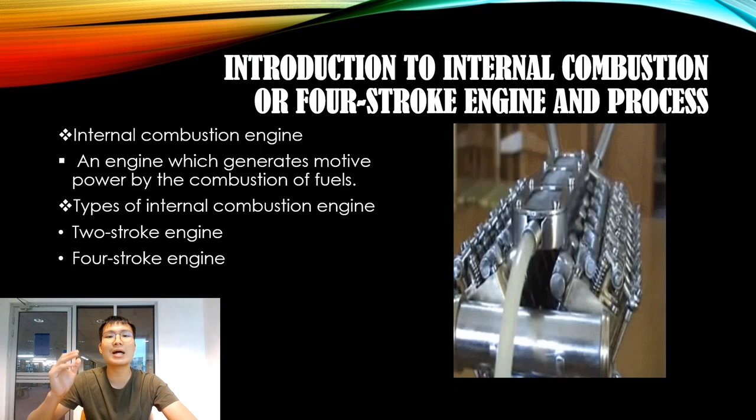An internal combustion engine is defined as a heat engine which produces work done by the combustion of fuels. Internal combustion engines can be either two-stroke or four-stroke. Instead of two-stroke, the most common internal combustion engine is the four-stroke or four-cycle engine, due to its reliability and performance. With the four-stroke internal combustion engine, automobile technology keeps evolving and is gradually accepted by the public, allowing people to shuttle from city to city freely nowadays.

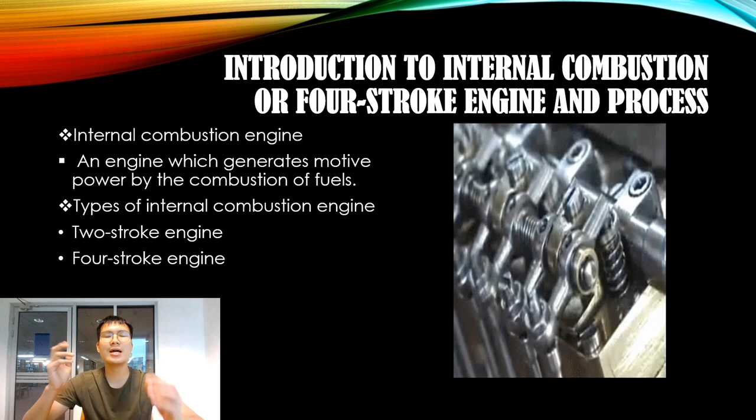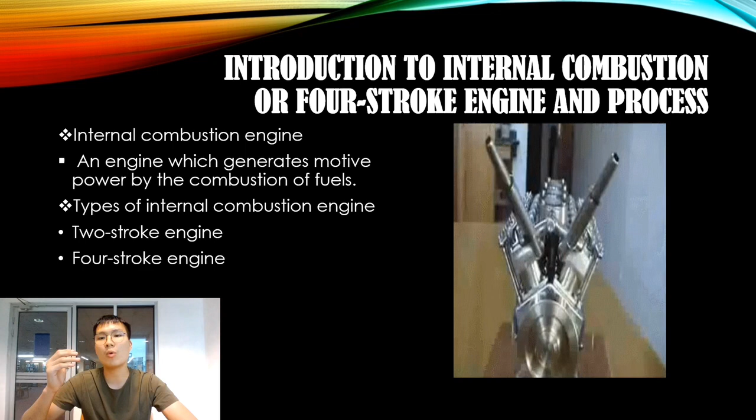SEC reported that on May 9, 1876, German inventor Nikolaus Otto, working with Gottlieb Daimler and Wilhelm Maybach, started the world's first internal combustion engine that efficiently burned fuel directly in a combustion chamber. Combustion in a car engine includes four important phases, which are intake stroke, compression stroke, power stroke, and exhaust stroke.

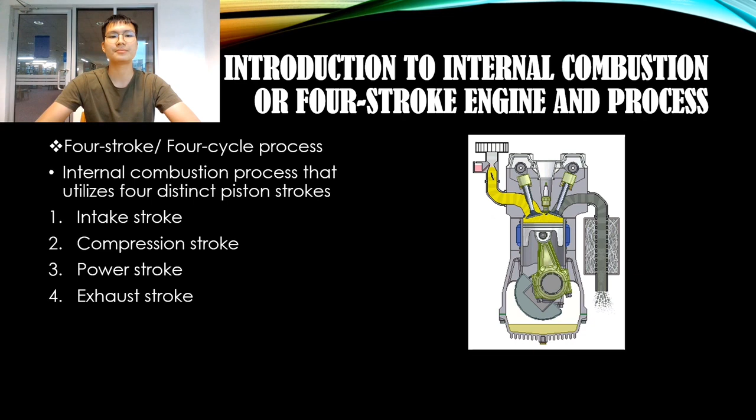I will talk about the first phase of internal combustion. The first phase is the intake stroke, which is the initial process of internal combustion in a car engine. During the intake stroke, the combustion chamber is filled with fuel and air, and the piston starts at top dead center, called TDC, to empty the combustion chamber. The piston then depresses inside the cylinder bore.

Next, whirling flows are induced by the inlet flows through the intake port and valve. This creates large-scale rotating patterns such as swirl motion and tumble motion, which rotate cylindrically and diametrically about the axis respectively. The induction process is extremely crucial because it is part of the intake process used to obtain high turbulence intensity in order to achieve a rapid burning rate.

Meanwhile, the exhaust valve is closed to allow the formation of a vacuum by the piston moving downward, which transfers the air and fuel mixture into the engine through the intake valve. According to Yamakata, the air-fuel charge is forced into the evacuated chamber when the inlet valve opens, due to atmospheric pressure. Consequently, the chamber is filled with the combustible mixture of fuel and air. The piston arrives at bottom dead center, called BDC, then the inlet valve closes, and inside the chamber the mixture of fuel and air is sealed.

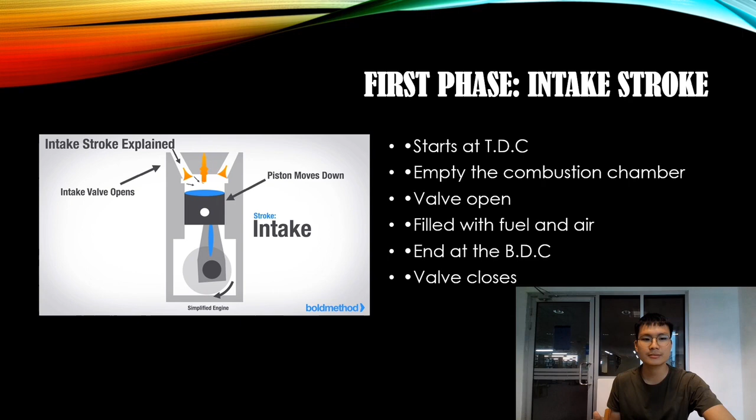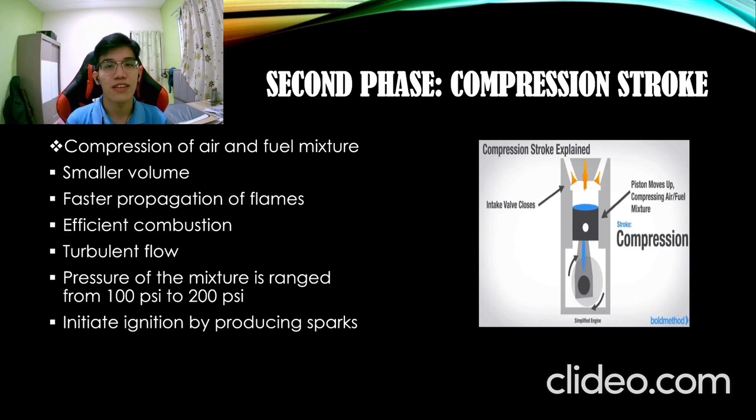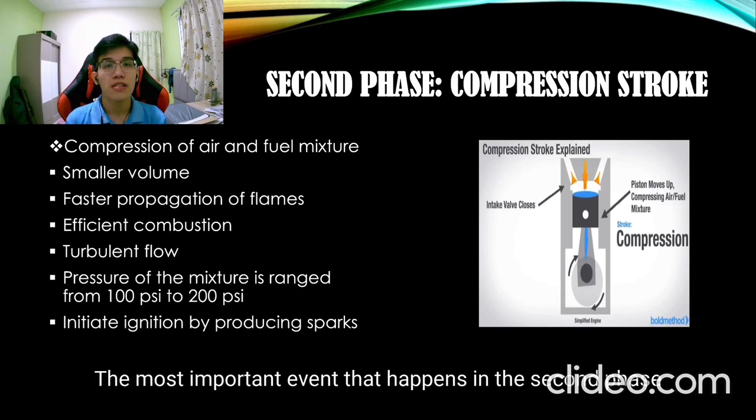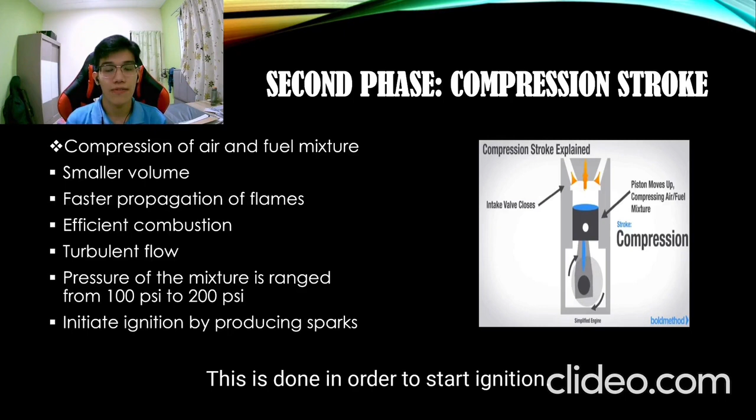Today I'm going to talk about the second phase of the internal combustion process in a car engine, which is the compression stroke. The most important event in this phase is the compression of the air and fuel mixture. During the compression stroke, the mixture of air and fuel is compressed to a smaller volume by pushing the piston and closing the intake valve. This is done in order to start ignition.

The propagation of flames is also done more quickly under high pressure, which allows the mixture to be burned more efficiently. Not only that, a turbulent flow is also formed under high pressure. Consequently, the mixture of air and fuel, which is in the form of fluid, also undergoes uneven fluctuation.

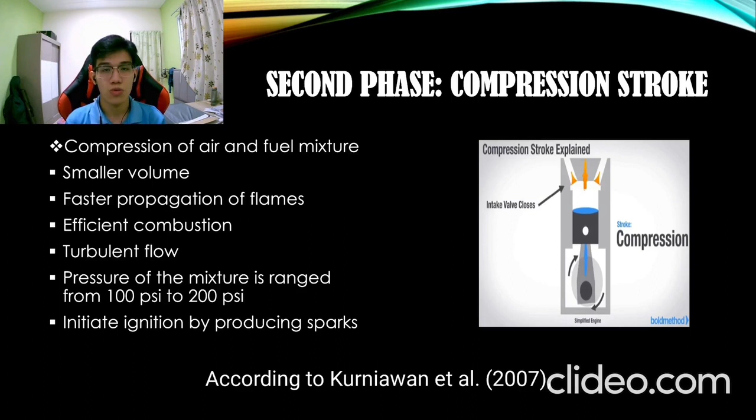According to Kurniawan et al. 2007, maximum turbulence is required to produce a uniform and even mixture of air and fuel, as well as a higher compression ratio. Normally, the pressure of the mixture ranges from 100 to 200 pounds per square inch. At the same time, electrical contact is kept open in order to produce sparks, which allows ignition.

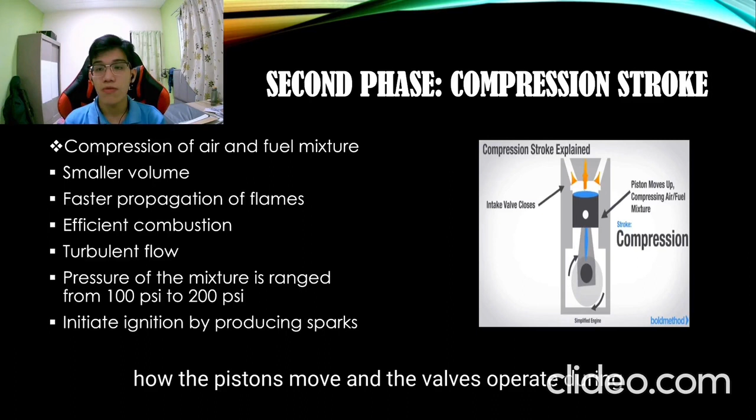Here is a simple diagram that shows how the piston moves and the valve operates during the compression stroke. During the compression stroke, the mixture of air and fuel is compressed to a smaller volume by pushing the piston and closing the intake valve.

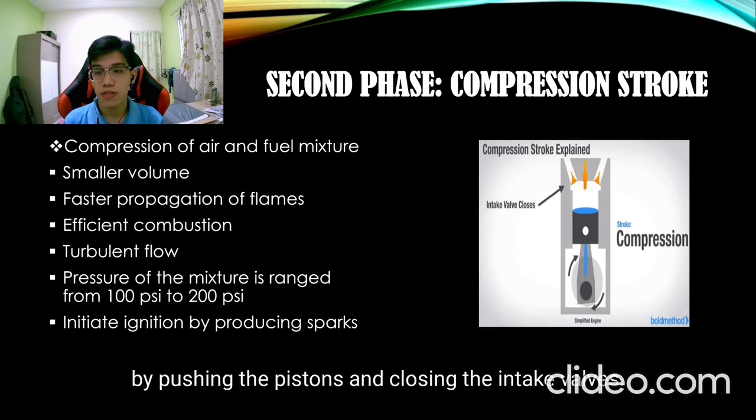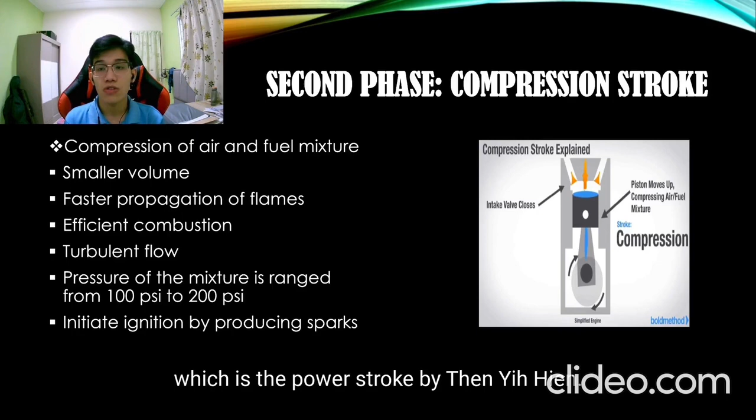Good morning. I will present the third phase of the internal combustion process, which is represented as the power stroke. During the power stroke process, before the piston reaches its highest point, named top dead center, the spark will send a current and ignite the fuel-air mixture. As the fuel and air combust, they expand and push down the piston. The directional motion of the piston moving down is converted to rotational motion as the piston turns the crankshaft, which provides power to the whole engine.

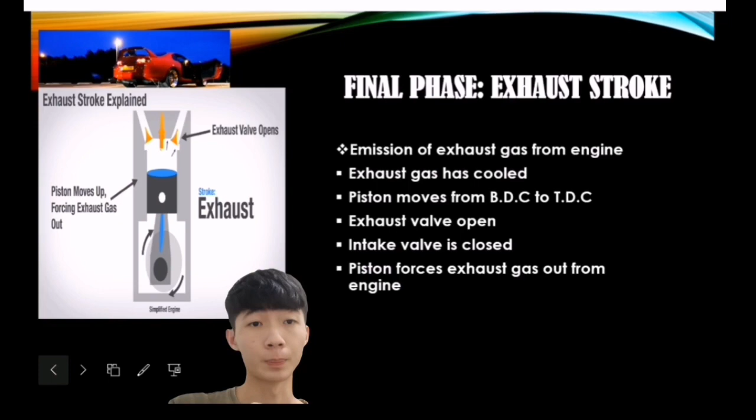Then the piston moves from bottom dead center to top dead center. After this, the exhaust valve opens and the intake valve is closed, pulled by the rocker arm, as shown in this picture. Then the piston forces the exhaust gas out from the engine through the exhaust valve.

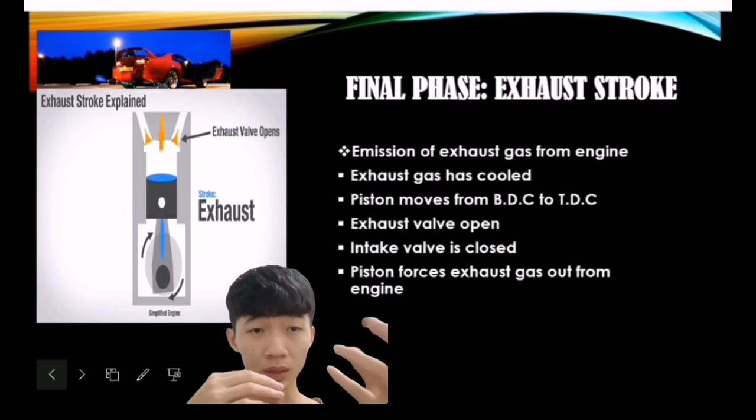This process continues when the piston stays at top dead center and is ready to start the first step of internal combustion of the engine, which is the intake stroke. So the intake valve now opens, and the exhaust valve closes.